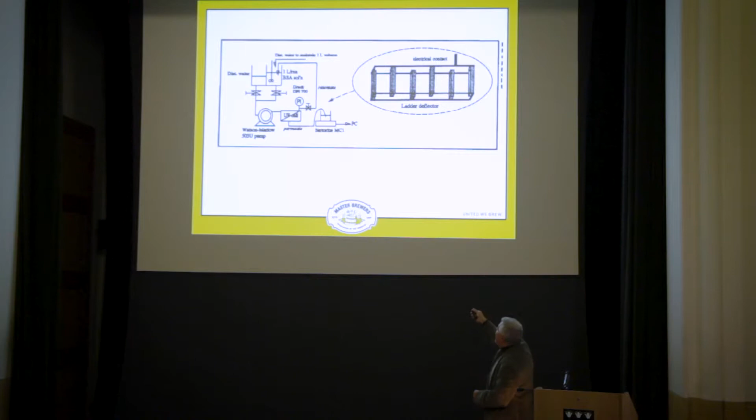And all I did was I made those positively charged, and supporting the membranes, I had porous stainless steel. I made that negatively charged. We were separating things that were highly negatively charged. So by imposing an electric field, not only did I have the vortex wave helping scrub them, but I had an electrokinetic thing. And later on, after I published this one, I created a sweeping field.

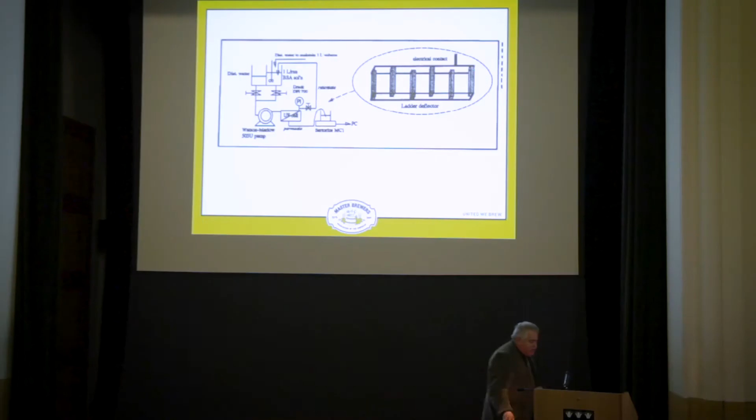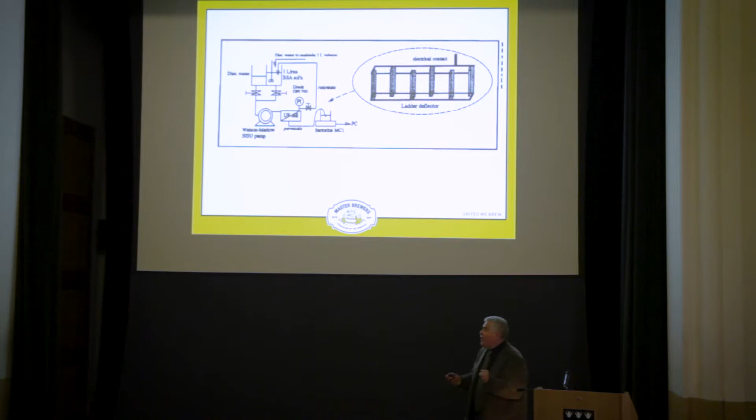We changed that a little bit, so we had little tabs on all these, and we did a transient sweeping electric field. So Brian's interest there was, okay, we've got something, and now we've added on, but the good part is we can have a smaller surface area to get the same flux, but there's a penalty. The penalty I've already talked about is losing the surface area contact here, but now I'm using electricity. This is something that's got saline in it, so we're continuously consuming electricity. So we came up with a really good exploration.

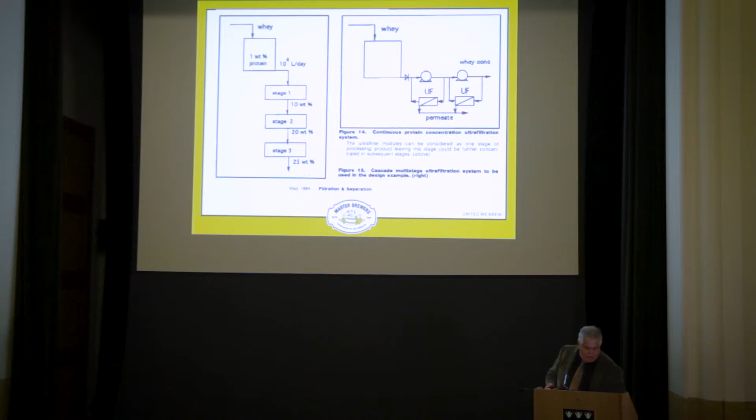Did I just jump through some slides there? That's right. Yeah, I did. Okay. Let me go back over here if I can.

Okay. So after we got data, Brian said, because I came from the brewing industry, I was used to scaling up stuff from bench or pilot to larger scale. Brian said, go for it, Jaime. Let's come up with something that makes sense, that you can use the data you have and apply it to a theoretical design. And something that was available easily was whey. Typical whey concentration when you get it from dairy is 1% whey protein. And to make something like Cow & Gate, when they make their whey-based baby food, it's 25%. So we had some real parameters to say, let's use what we've learned on this, design to scale up.

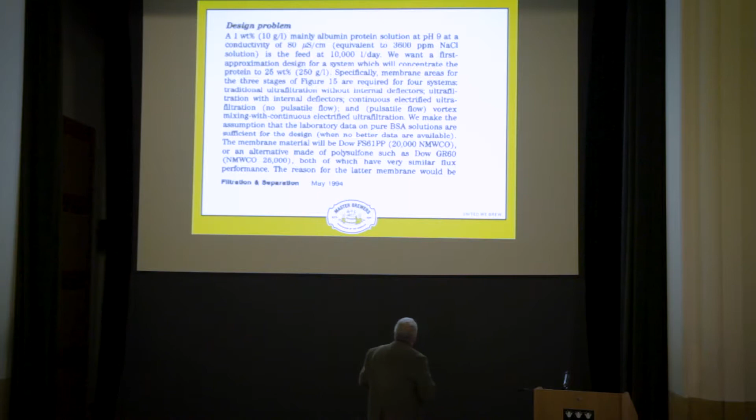And if you see, the design this paper was on, oh, you really can't see it very well. But there were four different kinds of situations. We're going to design and look at the size of the membrane needed, and also quantify the electrical consumption. So basically you have whey coming in, 10,000 liters per day, 1%. In three stages, it would end up 25%, a semi-continuous concentration.

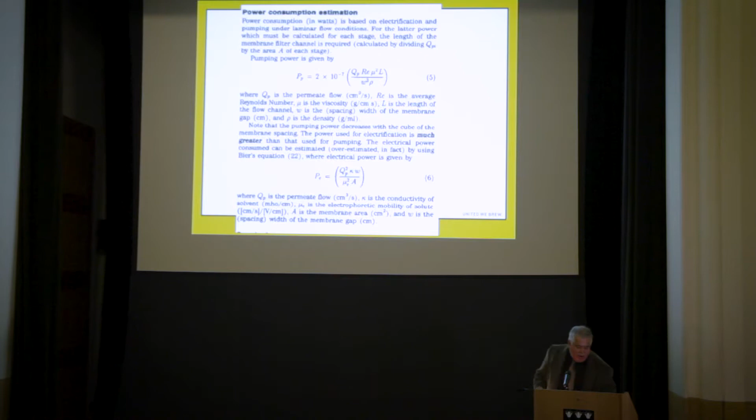And Brian said, you've got to calculate the power of pumping, and let's quantify the amount of electricity used. So I found the equations and applied them to find out how much power. And eventually the mathematics was done, and we came up with a number of how much and what the surface areas were going to be for the various membranes. And again, the takeaway from that is the economy. Brian wasn't even talking about economy. We were trying to increase the flux, which naturally meant decrease the resources we're using. And the penalties were things like the surface area and also the energy that I consumed when I was adding.

Later on, one of my good friends, Siamak, was doing his PhD, came a year after I did, and he took Brian's ideas of the vortex wave and came up with reverse pulsing. So he took some of the permeate and pushed it back. Siamak's now a professor at a university right outside Tehran, and couldn't be here today. As he describes it, the MIT of Iran.

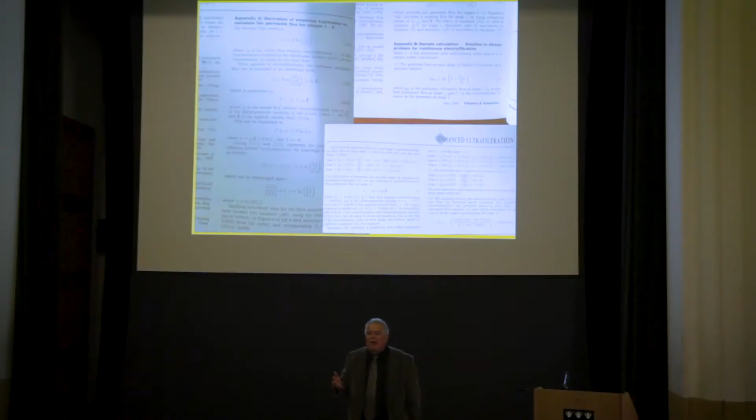It's funny because if you travel around the world, inevitably, you never hear a place, oh, this is like the Oxford of Guatemala. It's always, this is the MIT of Guatemala. And some of these, I've been to a couple of these places, and you say, this is more like being the headmaster of a homeschool. But anyway, no one ever talks about this is the Oxford of, because I guess Oxford's so unique.

So now I'm going to show you some real world, quick 3 examples of the real world of engineering economy. But I have to say, Brian gave me that orientation. We all have it. We're doing something, we want to innovate, we want to show that we've done something that's better than we had before. So it's in our genetic code as engineers. But here's a typical, practical situation. This is from my brewery in Louisiana.

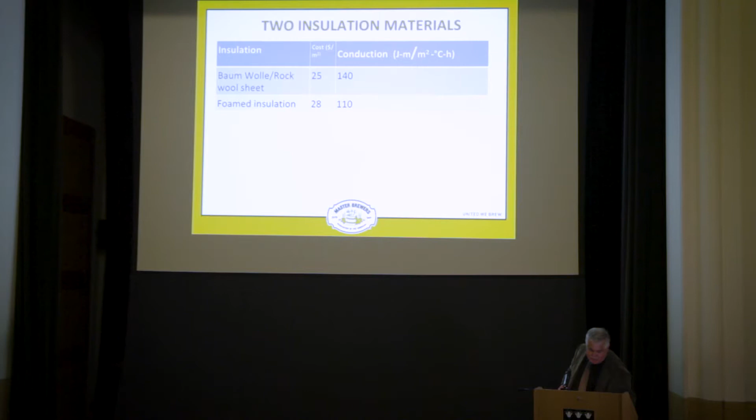Now, why won't it advance? Why won't it advance? Sorry, this thing is acting up. Come on. Oh, I won't. All right.

Okay, so I had a room, I had to keep it insulated and cooled, and we have 2 simple options. You can use a rock wool, Baumwolle, as they would call it in Germany. I studied brewing in Germany. Or you can use foamed on insulation. So, simple thing that we have 2 different materials. They cost different amounts, $25 per meter squared. They have different conductivity rates through them.

So, familiar calculations. We all knew this in our first year of engineering, how to calculate using the constraint that the world-class standard is. This Q is going to be 30,000 or less. So 30,000 is the world-class number. So basically, you have the heat transfer coefficient, you have the change in temperature. In this case, it's a 43-degree environs. It's pretty warm in Louisiana, in New Orleans. But I wanted the interior to be at 13 degrees. So it's like a 30-degree centigrade differential.

So we just calculate the L. I mean, this is really easy stuff. This is engineering for brewers. And basically the cost, you can see that the rock wool, because its conductivity is greater, it pulls the heat away, you need a greater thickness, but the insulation is cheaper. That's just a simple example.

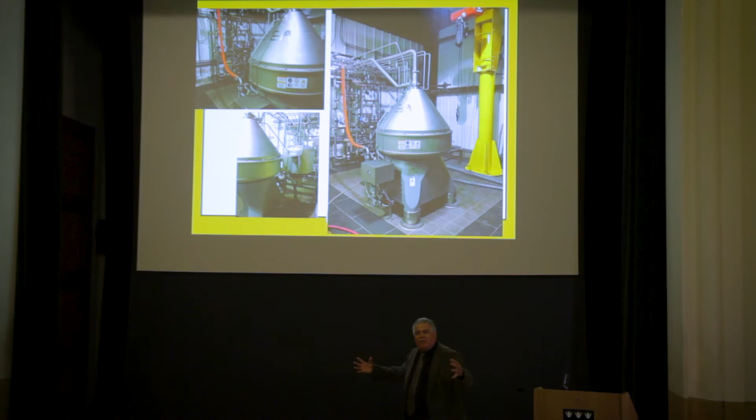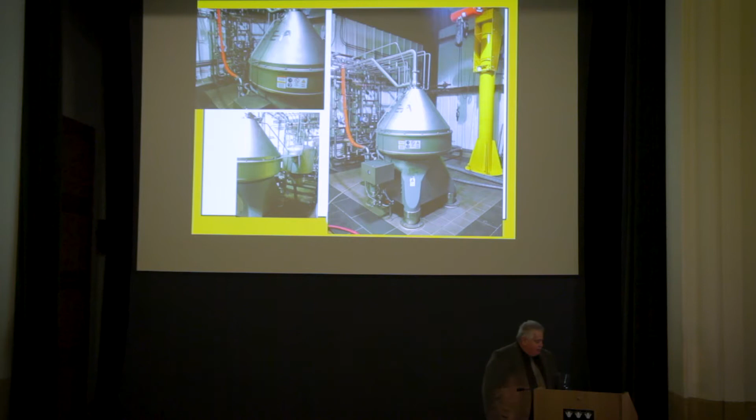And when we installed it, this piece of machinery cost $410,000. And then it cost me another $80,000 to install. It's not very pretty because we actually did it ourselves. We mobilized people from other breweries, our sister breweries. We came in and we had a stainless steel welder. So it's not as pretty as it could be, but it runs very nicely still. And its payback was pretty fast.

The third example is membrane filtration, sterile filtration versus pasteurization. Most large breweries have pasteurizers. They cost a lot of money. Your milk, whatever you have, your beer comes through, and it gets heated up in stages, gets up to 140 degrees, where we have a log reduction of any viable organisms, and then we cool it down. So the option is sterile filtration.

Now, you don't have to do this, but if you're a major brewer exporting around the world and you want 8 months of shelf life, you sleep better with some kind of treatment to make sure that nothing in that beer will ever get you sick. But if you have microorganisms you don't like, Brettanomyces, Acetobacter, you'll never get sick, but they'll change the flavor from what the brewmaster wants. And we don't like our flavors changing.

Of course, the secret to this brewmaster is, you ever get a complaint, you always blame the customer. No, it's very perfect. You go, Jesus, it's awesome. But you always keep your poker face on.

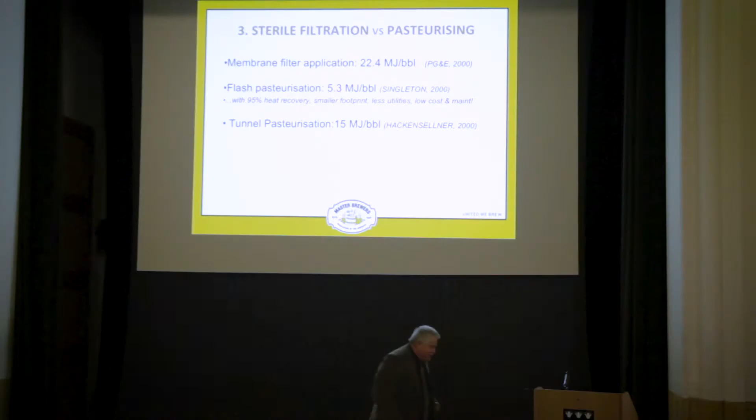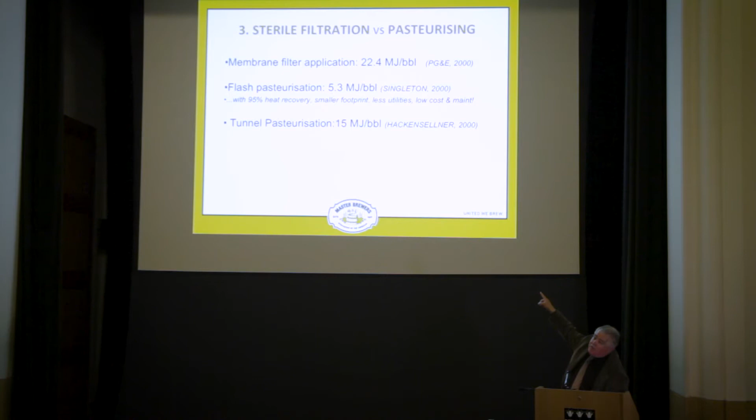But so this is the amount of energy used. Hackensellner in Germany was doing his research, quantifying it. Singleton was up at Heriot-Watt University for flash pasteurization. Membrane filters, this was Pacific Gas and Electric in the Pacific Northwest, all about the same time. And there's a process. I won't go through it.

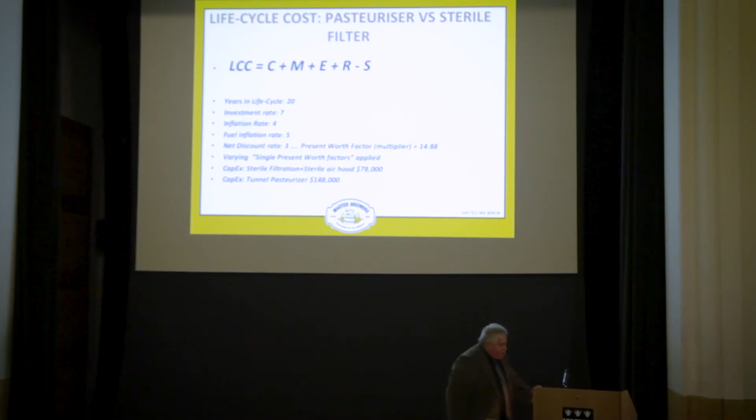I love it. I give lectures in engineering economics, seminars. The last one I gave was at Georgia Tech. They invited me for an hour-and-a-half seminar. And I really go to show the examples in the mathematics. This is the life cycle cost calculation. I won't go through it. We don't have time. But in this case, I had a choice of a $78,000 capital investment for sterile filtration or a tunnel pasteurizer at $148,000.

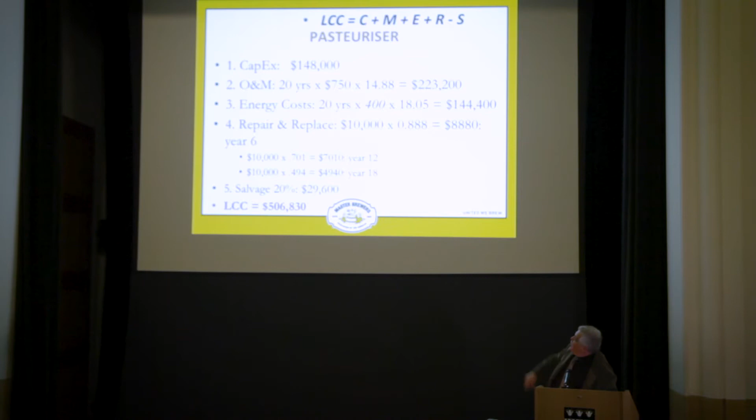And when you do the life cycle cost over 20 years, the pasteurizer would cost us $506,000, and it's a little bit over twice as much as a sterile filter. When I built this brewery in Pennsylvania, I had capital, but it was other people's money. But those other people were partners with myself. It was a $5.5 million brewery.

So they didn't get it. Why am I spending all this money when we can get a $78,000 solution? So by showing them the life cycle cost analysis, they didn't understand it, but their CPAs, their chartered accountants said, this is right, the math is right, you're better off in the long run. So here's what that particular machine looked like. That was 5 feet wide and 42 feet long that we installed at my brewery in Pennsylvania.

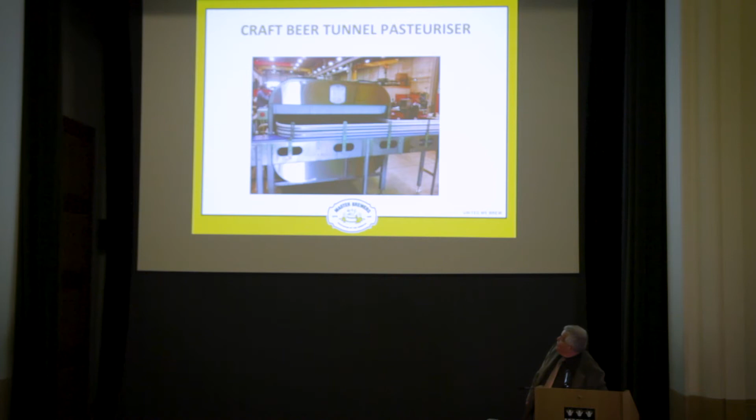And I'm going to just close up with the last frontier of where I continue to go. And I mean, I'm not making this stuff up. I never really thought about that. But my time with the medical engineering unit, Brian got me to appreciate the fact that you had to have benchmarks. Everything we're doing was trying to improve things. And you had to see where you were and where you're going to.

I mean, let's face it, those of us who knew Brian, you could almost characterize him as a little boy on a beach. See something shiny. Oh, it's interesting. Why is it shiny? Sees a nice shell. And when you look at his career, Brian has been a little boy on a beach, indulging himself in the things that stimulated him. It was all scholarly work, of course, but his diversity, and maybe that's why he liked having a brewer on staff. He did, and don't take this the wrong way, he did appreciate beer, he did enjoy it, in moderation, in moderation.

But I'm closing up with something, this is some work I did a few years ago. I've tried to unify the discussions of sustainability in my industry, using a technique called data envelopment analysis, which is a way of ranking and scoring in a methodical way. The trouble with breweries is there's a lot of breweries out there who do greenwashing. One thing that brewers always say, I'm a very dynamic and sustainable brewery because I give all my spent grains to farmers. Brewers have always done that, and the reason why we do it, it's cheaper than putting it in the dumpster. So cows can eat, whoopee, and too many of us say, oh, I'm sustainable.

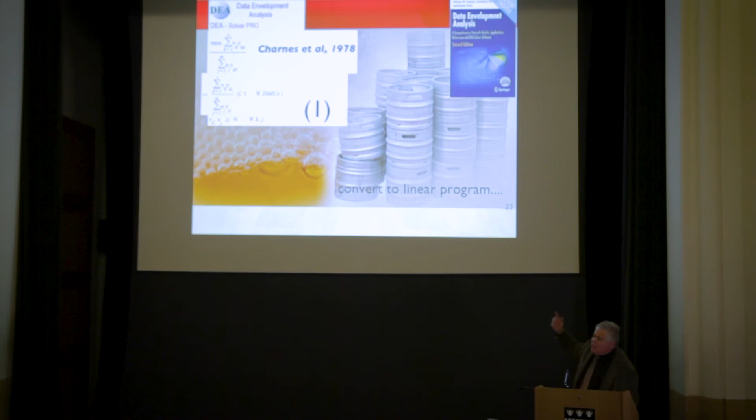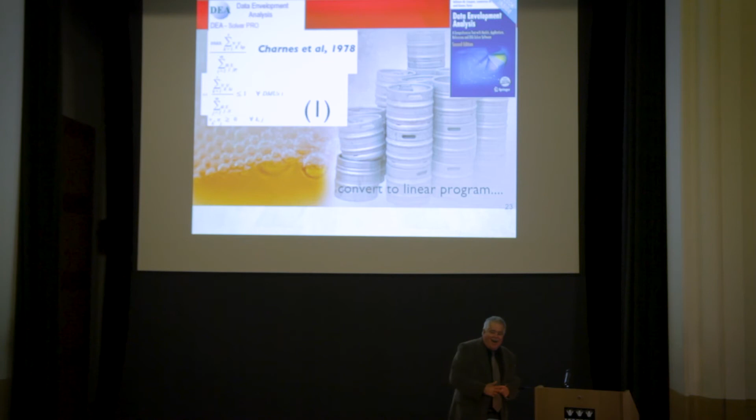So with that, again, everything's on software. And these fellows are real pioneers. They had to write code. Now you just buy stuff and put in the parameters, make the picture, and let it solve. In this case, it's DEA Solver, using this very beautiful technique. It's an elegant technique used for data envelopment analysis. As a matter of fact, after I gave my first talk on this, there's a professor at the University of Minnesota who is implementing it across the engineering school, looking at the different programs, using the same parameters to rank. I'm not quite sure of the full parameters of that.